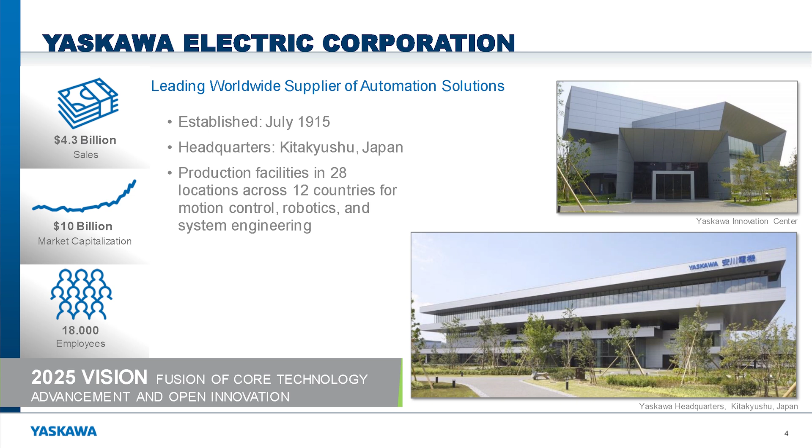About Yaskawa, we are a Japanese company headquartered in Kitakyushu, Japan. We have annual sales, depending on exchange rates, usually between $4 and $4.5 billion, a $10 billion market cap, and 18,000 global employees. We have production facilities in 28 locations across the globe.

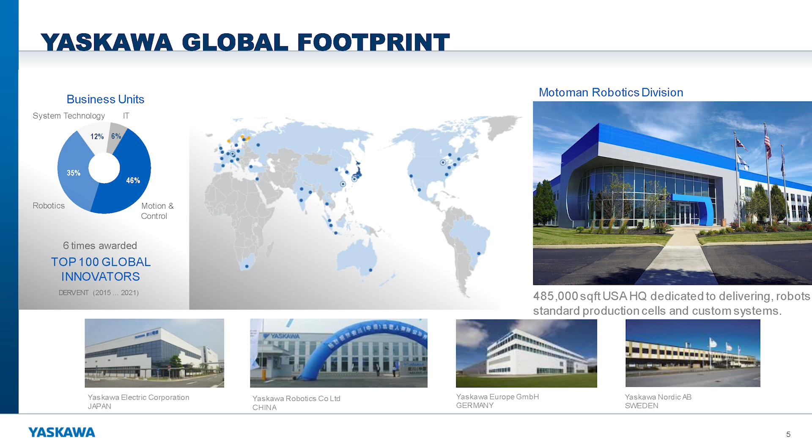As that splits out, we divide regionally into three different areas. Yaskawa Electric Corporation in Japan is in charge of all of Asia and Australia. Yaskawa Europe in Germany is in charge of the whole European and Middle Eastern area. And our headquarters in Miamisburg, Ohio is the robotic headquarters for all of the Americas region, which includes the US, Canada, Mexico, and Brazil.

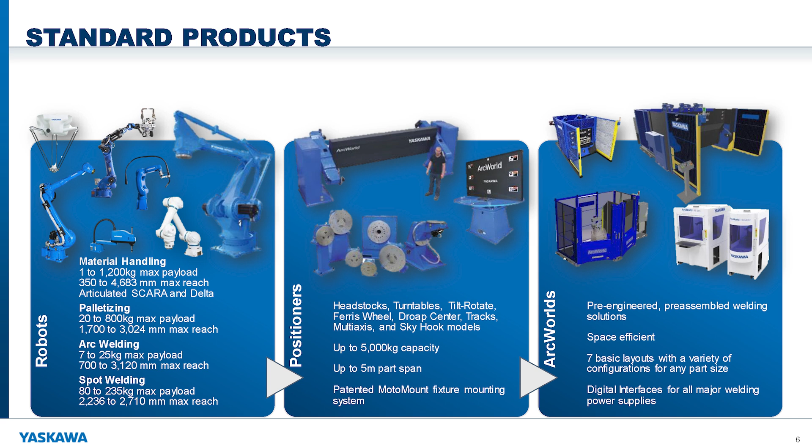We have a full line of robots, positioners, and we also do pre-engineered turnkey work cells. Those are predominantly to support the welding industry, but on the material handling side, one of the key areas of growth and focus for us has been the logistics and warehousing industry.

As we look at that, and as I mentioned, I have a lot of background in the manufacturing industry - on the left-hand side, you see a lot of single case piece picking, getting that all put into cases. The cases are then built into pallets, and those pallets are distributed. That's kind of standard. Traditional automation has been serving that for decades.

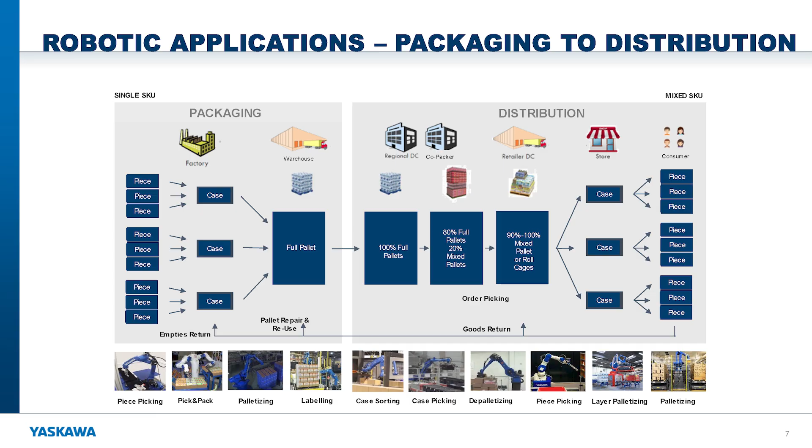As we get into distribution, fulfillment, third-party logistics, and pretty much everything that's the focus of this show, we take those full pallets and split them up into mixed cases, split those cases down into individual pieces, and then fulfill those throughout an entire warehouse. So as we've evolved in the automation industry and moved things forward, we get into ever more difficult applications for robots and other types of automation.

What that looks like, obviously on our end, we do a lot of robotic piece picking, a lot of case palletizing and depalletizing, and we also do some layer picking.

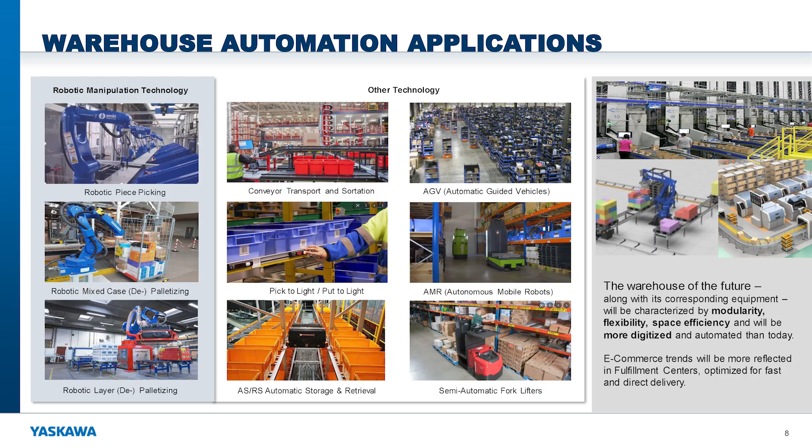Outside of just robots, there's a lot of other opportunities for automation in the industry - a lot of conveyors. You'll walk around the floor here at the show and see a lot of different conveyor companies. AGVs are an expanding way of getting goods throughout a facility. And where we're keeping humans in the loop, we do a lot of pick-to-light and put-to-light, allowing lower incidences of mispicks or incorrect order fulfillment.

AMRs and ASRS systems are getting more and more complicated, more common, but people want to get more out of each one of those systems. They want higher speeds, more product density, as well as on the load-out side, being able to get those products inducted into that system, and then as you're pulling it out, you're fulfilling an order. We have robots on both ends of those ASRS systems as well.

Another thing you'll see a lot on the floor here are these semi-automatic forklifts. All of these things - the entire warehouse industry is in transition as things are becoming more and more automated. And so even with these applications and these areas for automation, things are continuing to grow.

As we look at things over the last 15, 20 years, you had a lot of palletizing, case erection, depalletizing, labeling - standard applications that can be pre-programmed, pre-coded, and allow that robot to do the activity without any type of external sensors, without additional programs running, no AI.

But then as we've expected more and tried to get more of a human replacement, we're getting into more and more mixed SKU applications. So intelligent picking, changing the actual speed and trajectory of the robot based on what it's picking, understanding what it needs to go get without it having been pre-programmed, doing parcel induction - and being here in Plus One's booth, obviously parcel induction is something they're a market leader in - quickly handling a large number of products that aren't pre-programmed. You don't have predefined pick points, and you have to react to the reality of life.

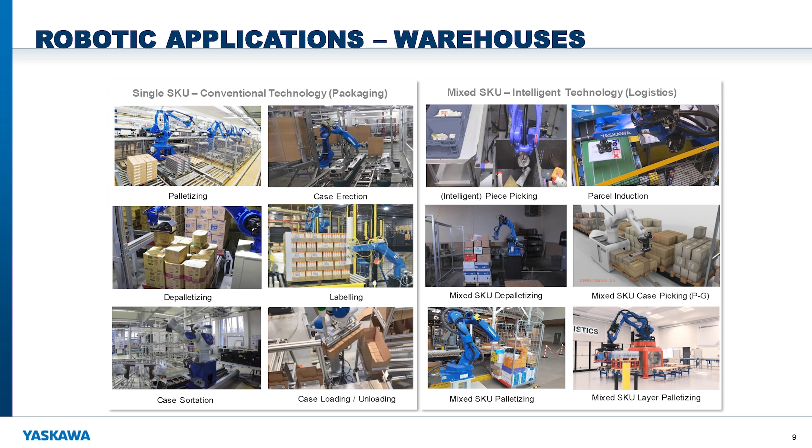And creating those pallets as well, and doing the full layers. So how do we go to market to meet these demands?

Yaskawa is a robot company first. So what do we want to do? We want to capture that lead, and we want to sell a robot. What we need to do to get there often is engage with our technology partners, the people that will provide that vision, provide those pick locations, identify and segment those items, people like Plus One that have that software and support to get that mission accomplished and close that loop for us.

In some cases, they can sell direct into those customer applications, but also frequently they'll engage with a system integrator, who can engage with Plus One to deploy those systems. So there are 3 different ways it can go, a lot of times based on the complexity of the actual application. Sometimes somebody can just buy a robot and integrate it themselves. Sometimes they'll need a technology partner to add vision and AI, and sometimes the system integrator will deliver a turnkey cell.

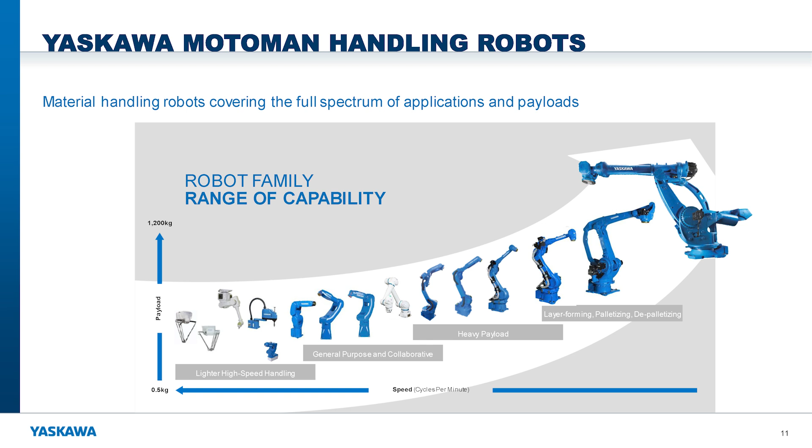With that, we are a full-line manufacturer of robots. So despite what the need might be, if it's high-speed picking, we have the Deltas and SCARAs, articulated arms moving through most of the path, as well as dedicated palletizing and depalletizing manipulators. They range from half a kilogram payload all the way up to 900 or 1,200 kilograms, and you can have up to a 4.7-meter reach.

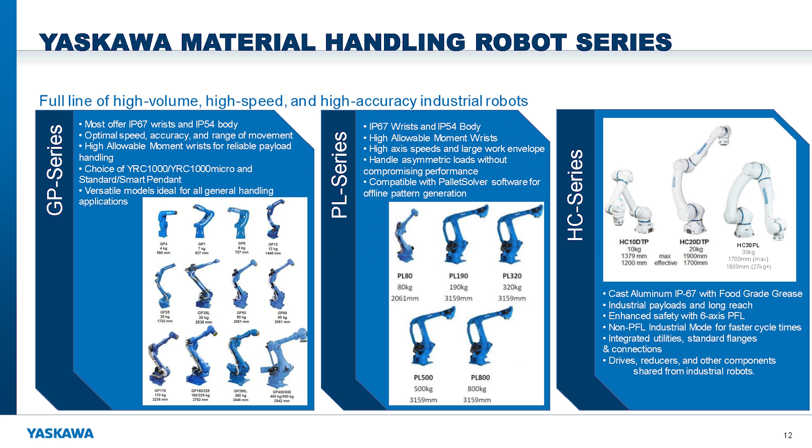The main 3 product lines are our GP series for general purpose, high axis speeds, appropriate for most applications; the PL series, aptly named for palletizing; and we have 3 different collaborative models that are all very industrial and have the same type of life, the same motors, the same reducers, as well as the same controller as our industrial robots, so you get the same performance and the same lifespan.

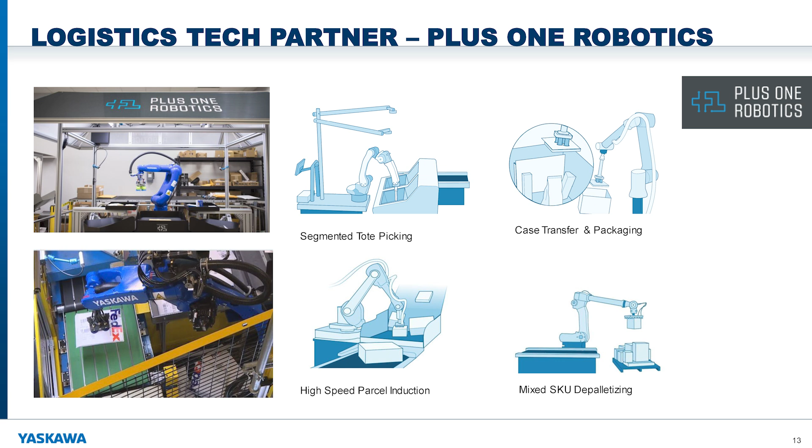One of the key places we have here is with partners like Plus One that have very specific areas of specialty, and they're able to bring that additional value. They have that expertise - I mentioned the high-speed parcel induction. They also do mixed SKU depalletizing, and some other applications. Their vision is very much leading in terms of high throughput.

They can get that recognition and segmentation done very quickly, and give those points to us in the robot. When we have things like mixed case depalletizing or parcel induction, frequently our robot never has to stop. By the time we've cleared the zone to complete a place, they've already identified the next pick, and we can get right back in there. So there's no downtime. The robot is used to its full potential, and the vision system operates at that speed or faster.

Other things that they bring into play - Plus One has a lot of different value that they're bringing. In many cases, our robot is just the muscle moving the product. They have to see things, they have to provide us points, they have to understand what it is, and find the edges of any place that they're getting into and out of.

At any given point, regardless of how good your robot program is, regardless of how good your vision system is, there's going to be cases operating outside of what you expected. In those cases, their Yonder system allows a remote crew chief to provide additional information to get that robot back up and running and complete the job every time.

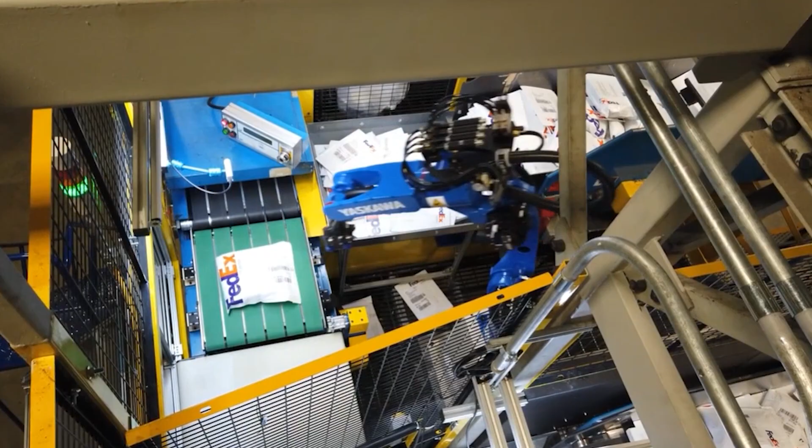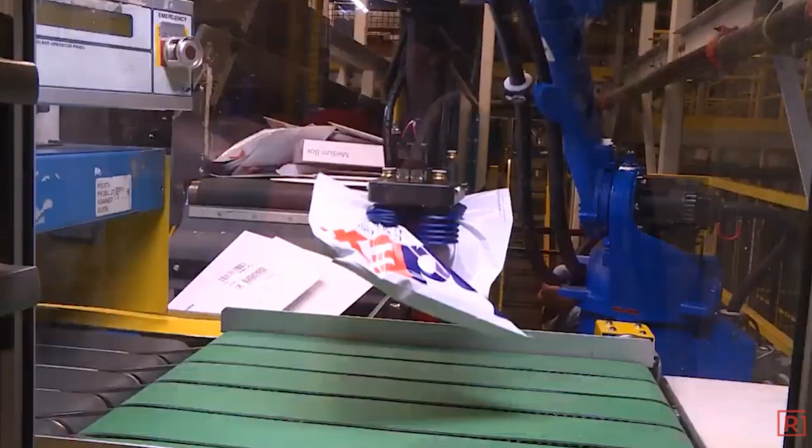Beyond that demo, we also have multiple installs in FedEx. With this being in the real world rather than the controlled environment of a trade show, we're averaging frequently anywhere between 1,300 to 1,500 picks per hour, depending on what's flowing through there and the reality of the situation. But in doing so, we have hundreds of thousands, millions of picks completed over the years, and it's been a very successful application and partnership. So we're looking forward to doing more.